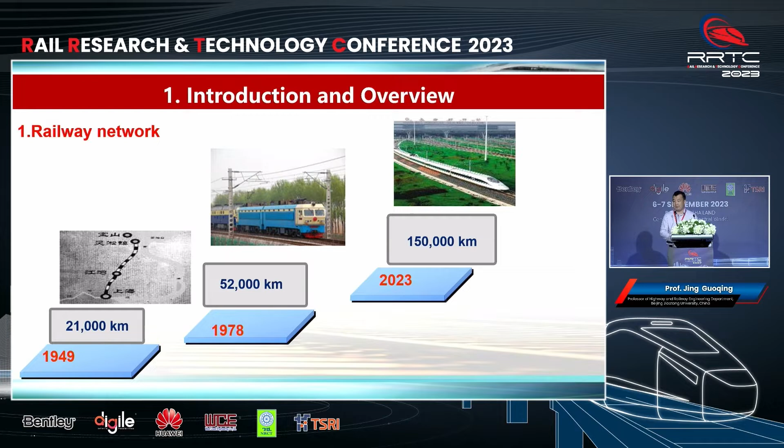And the operation speed, you can see, like 50 years ago, we shared the same speed level, normally less than 80 kilometers per hour. I would like to emphasize that from 1997 to 2007, it took us 10 years for 6 rounds of speed up, increasing our speed level to 200 and 250 kilometers per hour. In fact, by 2007, we had more than 8,000 kilometers of railway after speed up that can run at a speed of more than 200 kilometers per hour. At that time, we became the biggest network in high-speed railway.

At that time, not only speed up, 1 or 2 railways were newly built, the speed just 200 and designing speed 250 kilometers per hour. And in 2008, our first high-speed railway designing and operation speed is 350 kilometers per hour. Now, on the Beijing-Shanghai high-speed railway, the speed is 350 kilometers per hour.

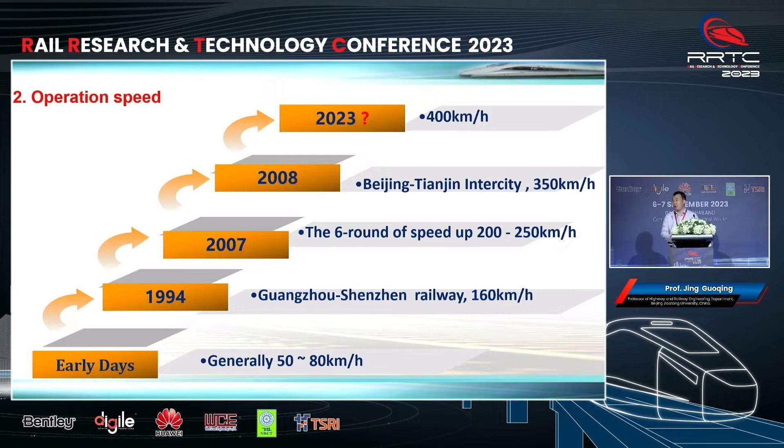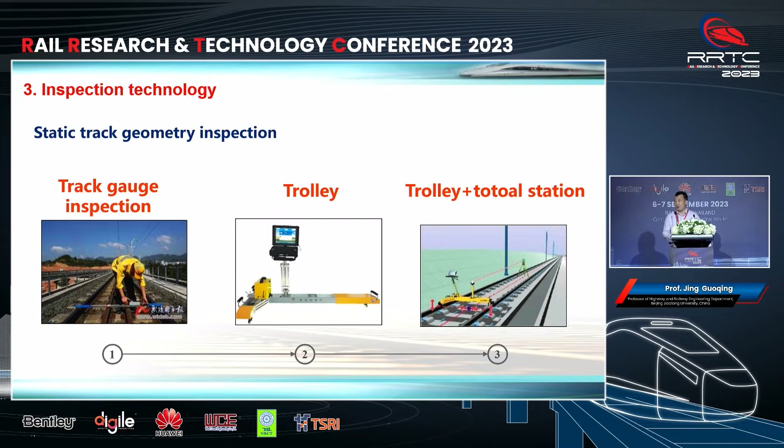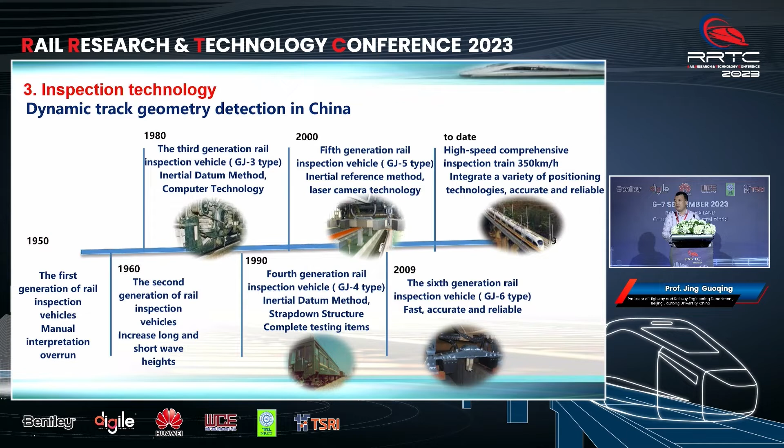For our inspection technology, normally we have 2 types. One is static geometry inspection based on gauge, ruler, trolley, absolute and relative methods for track quality. This is static. And we also developed dynamic track geometry. We imported the technology from other countries and developed our own system, generation by generation. Increase the speed, increase the system, increase the software for analysis. And this is the high-speed trains evaluating the track quality.

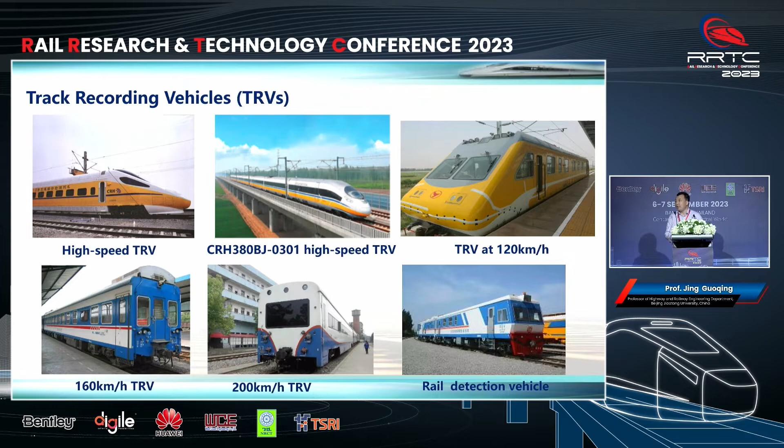For example, this one, we have more than 13 high-speed inspection trains with an operation speed of 350 kilometers per hour. This fleet is run by China Railway Academy of Science, responsible for all of China's 50,000 kilometers of high-speed rail inspection, twice each month. And we also have other low-level track recording vehicles run by the railway companies, 18 railway companies.

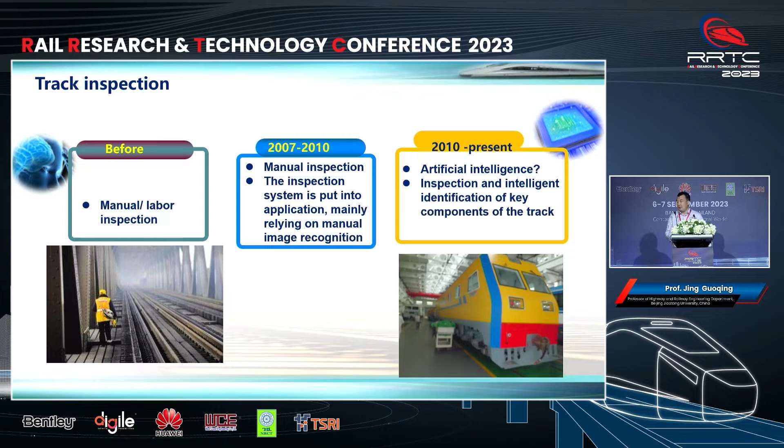And for our track inspection, in the past, we mostly depended on manual labor, and starting about 15 years ago, we developed computer-aided methods, like big data, sensors, management analysis. Nowadays, most of our result analysis is done by computer science. We call it a smart management system.

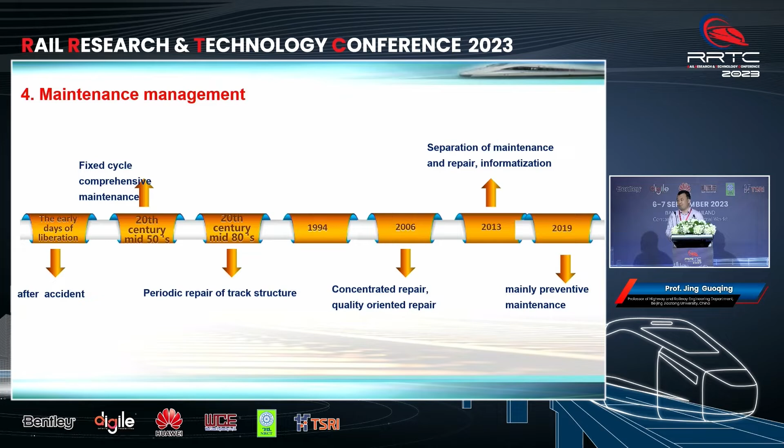This is our maintenance management system, like the standards for railway maintenance, periodic maintenance, and centralized maintenance. Now, from before COVID, we decided to depend on predictive, mainly preventive maintenance, but mostly we call it centralized maintenance. This is our maintenance management system.

Now we talk about the problems and challenges for China Railway track maintenance and evaluation. The first problem is labor. In the past, for example 4 or 5 years ago, every year China had more than 20 million newborns. But last year we only had 9 million. It is a sharp reduction of labor. This is the first challenge for us. This brings us some economic issues in China. And the second one is high cost labor. Each laborer in China earns at least 1,000 US dollars or euros monthly in salary.

We all know that track quality inspection, we call it 4DS: difficult, dangerous, dirty, and boring. No new young people like to take up railway inspection work because it's subject to human experience, time consuming, and mostly working in window time, which means very late at night.

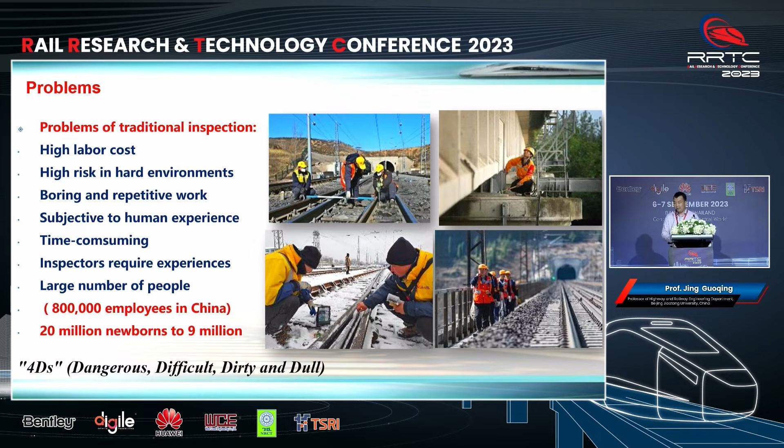This is our challenge. We want to use less labor, reduce cost, and nowadays in China, we develop robots.

For example, if you travel in China, in restaurants and hotels there are lots of robots for serving calls, delivery, reception, and even guard systems. It became very popular during COVID, and it has become a very popular industry for China. So lots of young startup companies are working on railway robots.

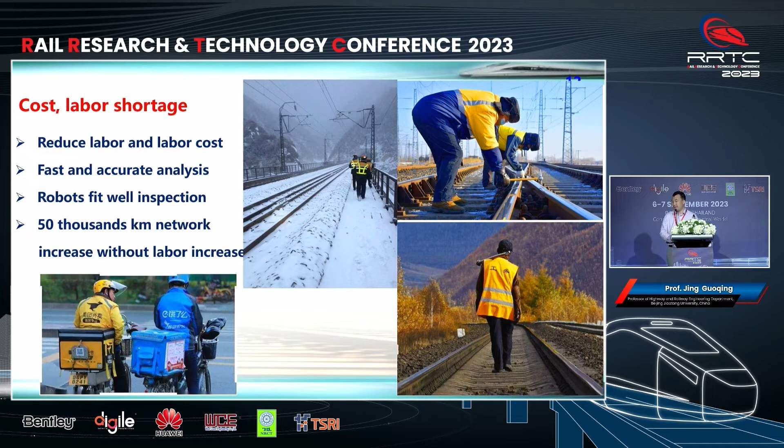Another solution is UAV for inspection. But there are problems in China. The first is rights for flight, because in China we have a very strict airspace rights control system. For example, in the Beijing zone, all year round there is no allowance for UAV operation. The second is pilot qualification, but now we have laws and regulations for these.

But for railway, UAVs have many advantages, for example in safety inspection. Everybody knows that along railways put into operation, there is no fencing, there are no regulations, and local people steal away parts and fasteners, resulting in big problems for railway safety. Now we employ UAVs for monitoring, for patrol, for safety.

Because in China we have many railway overseas projects, for example the same thing happens in Siberia. There are no regulations, no fencing, so there are lots of problems like vandalism, theft, and local animals running onto the track. But now we are using UAVs for patrol and management.

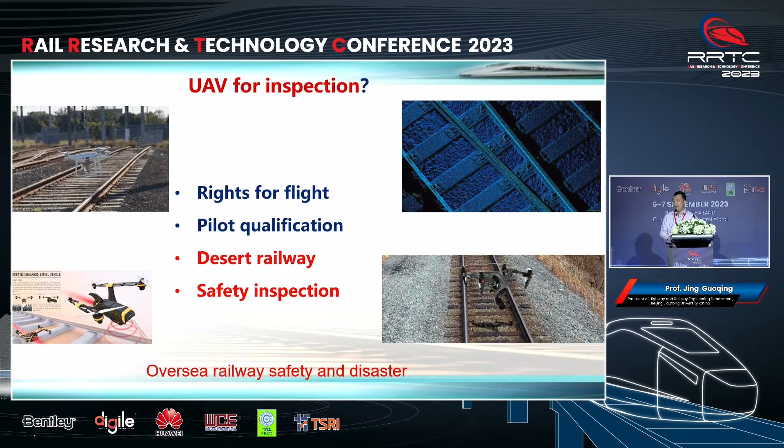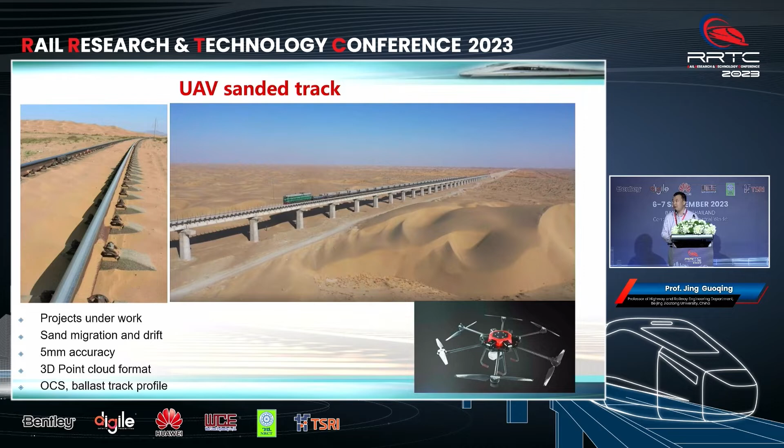Another thing is one of my research projects: we use UAVs for desert land, sandy tracks. Before and after sandstorms, we use UAVs to assess sand drift accumulation and distribution. Then we can make decisions about resources for maintenance.

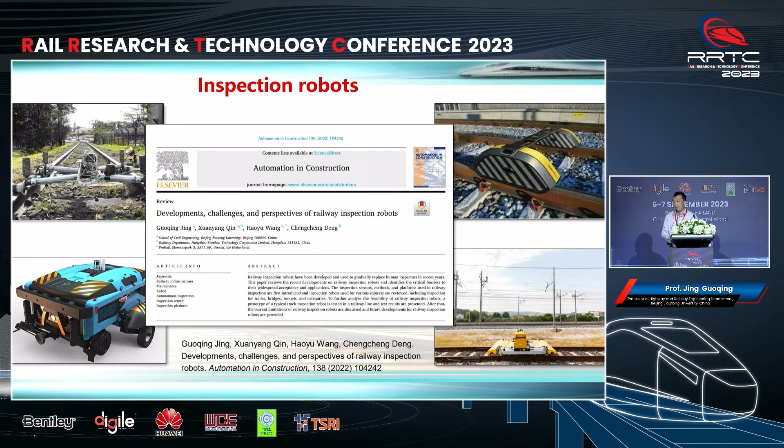Now we talk about railway robots. This is from a review paper I wrote with my team, about the challenges and perspectives of railway inspections. There are many railway robot companies in the world.

For example, the first one is from Italy - they provide this. The second one is a EU research product, it looks ugly. The third one is RailPod from an American company, this one can run automatically on the track.

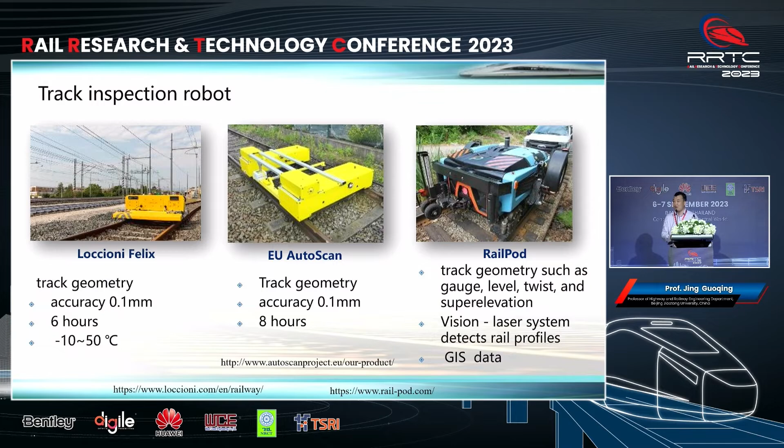Another thing I want to mention: at BKK airport, Bangkok airport, I saw an automated robot for cleaning. This is my first time seeing it in Thailand. I think, why not put it into railway and highway maintenance as well.

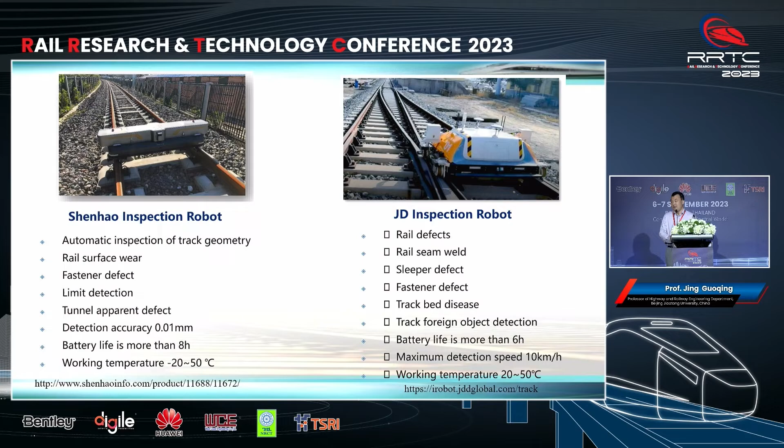In China we have about 6 companies developing railway robots. The first one, Shenhao, is one of my collaborators, and they use railway robots for track quality, fastener inspection, as well as the profile of the track. The second one is JD inspection robot company.

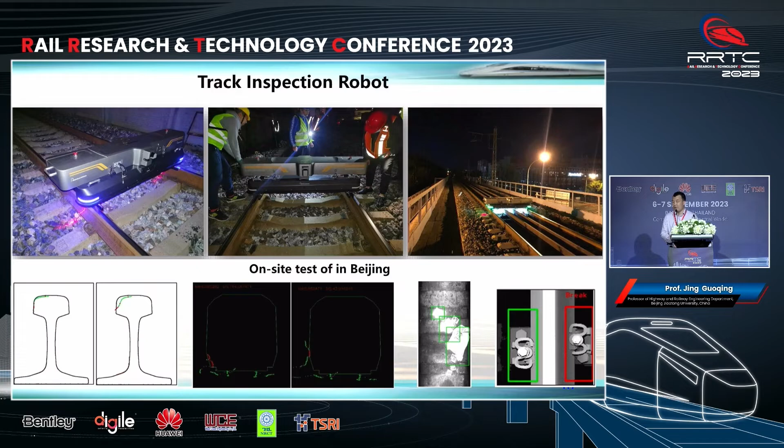This is what we did: we carried out tests in window time for the track, for fastener missing, and for profile. Another thing I want to mention is that the robot in the market costs less than $2,000 US. This is one of the trial products carried out in the Netherlands, designed to carry on and reduce the trouble and labor of railway workers.

I think in the future, with battery technology, we will have more robots paired with inspection engineers, reducing the trouble and the loneliness.

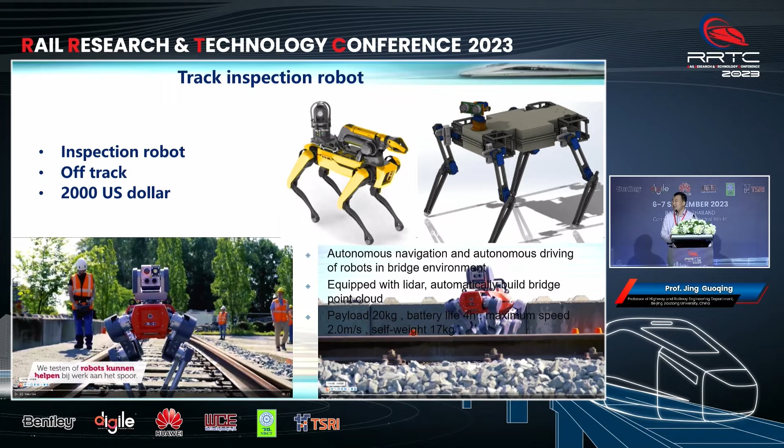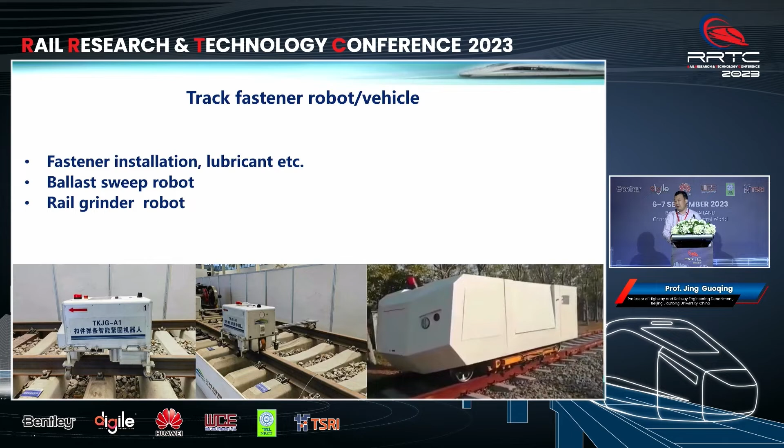A very big one, but we have trouble putting it into operation because the China Railway Department has very strict standards for vehicles put into operation on the track. We have standards as strict as a vehicle of rolling stock. So it is still put into, how to say, storage.

We also have robots for the undercar inspection. We have 3 robot companies in China, and this robot is used in China railway companies as well as metro companies. We export to Hong Kong and Singapore metro systems. It can reduce 80% of the engineers needed for inspection, with cameras for before and after analysis, very quick, 15 minutes, automatically run. And this is one for the roof inspection.

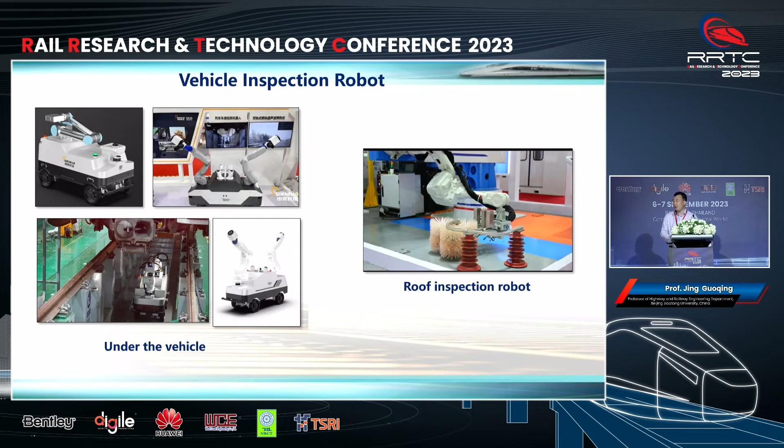We also have the robot for OCS, overhead catenary system inspection, especially for the metro system.

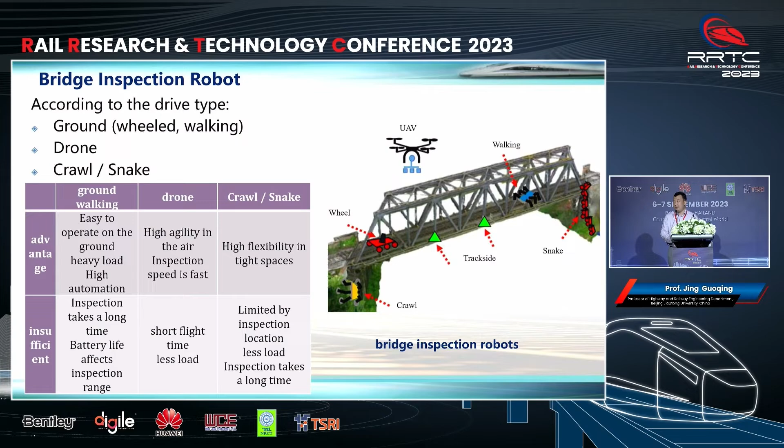There are also railway robot companies developed in China and in the world for railway bridge inspection. This is like our categorization, and these are also some examples from France and other countries for different types of application. And there are lots of bridges in China across rivers.

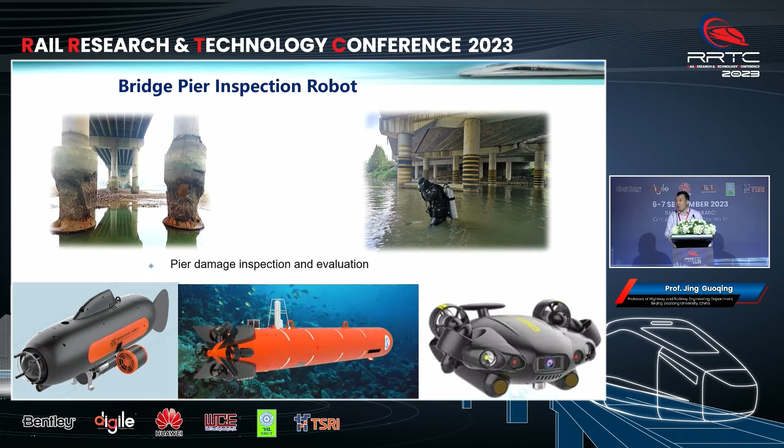So in the past, we used divemen, normally retired from military service, to dive into the river to detect the piers. But now many railway robot companies develop robots to detect the piers, like corrosion and damage, and use data analysis and computer science to analyze and provide a report. For example, for our Changjiang River, our Yellow River, the big ones, and even for some bridges across the sea.

Maybe this one. Okay, these are products from Amberg and EU, but we also have our own system. I think our system looks so ugly, so I don't present our photos here. The Amberg and EU product design looks handsome and smart.

So we use this. Each of these machines is about 1 million, more than 1 million RMB, but it can reduce the labor and work of railway workers. We have the system with, for example, GPR, laser, and camera, for all kinds of non-contact evaluation of the tunnel lining, as well as profile and falling rocks.

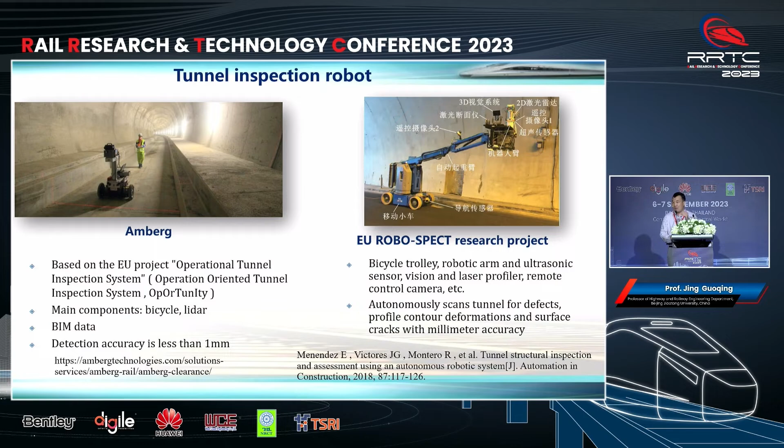This is one interesting from Japan. You know, Japan and Korea are like 20 years more advanced than China, which means they have more senior citizens than China. So with the aim to reduce trouble and labor, they use VR plus an operation robot to do some overhead OCS maintenance work.

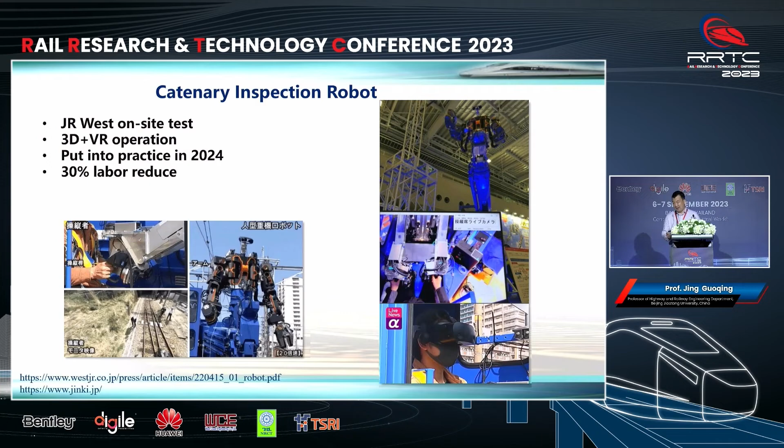Interesting. And the next part is part of my team's research and perspective for the future. Okay.

In fact, for the past 20 years, I have been working on ballast track, like ballast and sleeper. You know, almost all of China's huge scale railway construction is coming to an end. Most professors have shifted from structure dynamics to evaluation. So this is my global vision about the future of railroad inspection.

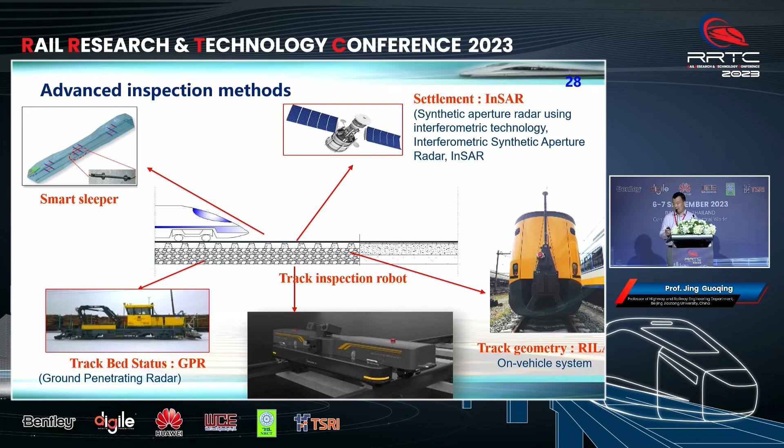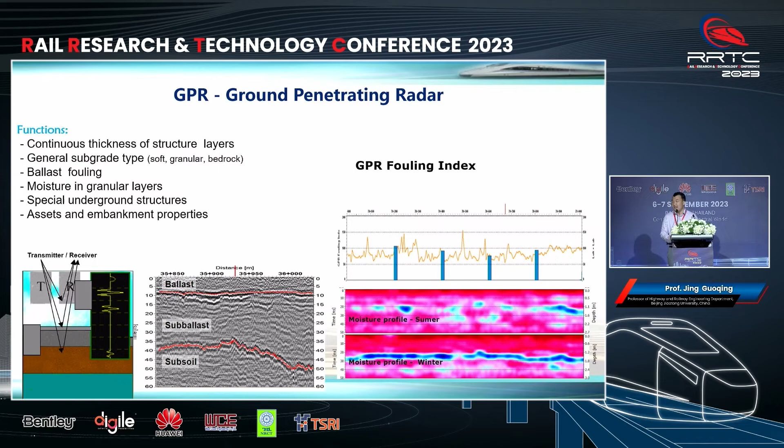This is GPR, and I noticed that Thailand has one high rail company developing rail infrastructure inspection. We developed GPR for track maintenance. During COVID, we tested more than 30,000 kilometers of ballast track in China.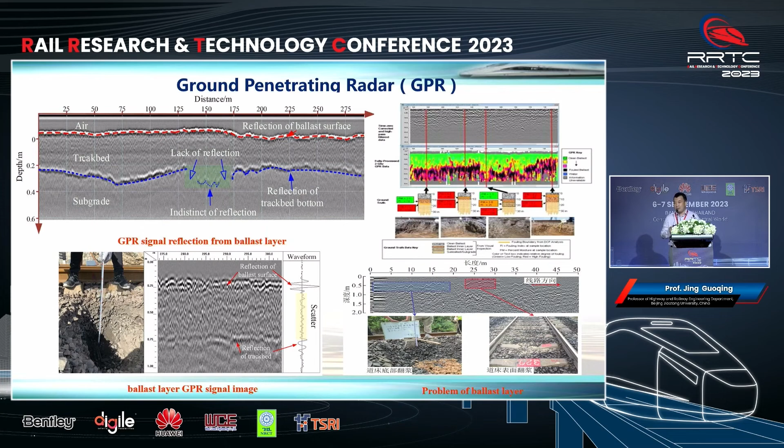This is our system for detection, inspection, and also validation. We set up a track of 30 meters with different ballast quality for validating our GPR system. This is my publication from the past 4 years.

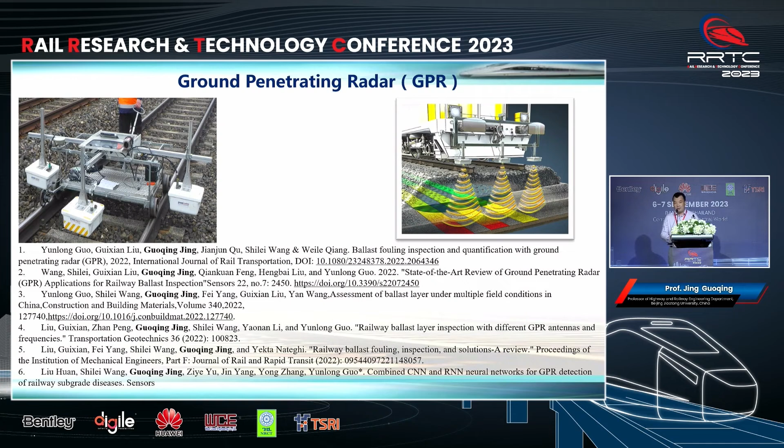This is a manual, but normally during operation, we just install it under the car body. It can run at a speed of 160 kilometers per hour, and collect the data. Then my team makes the analysis, and produces a report for the railway company for maintenance, for tamping, for cleaning. It can detect things like moisture, the fouling index, as well as the thickness of the ballast bed.

This is my research, a RILA system developed by one of my former students who worked for this company. Other countries like Germany and America also have similar products and services.

We also have our own onboard system with sensors to detect the track quality profile. But this one is special, it's in front of the car body. In China, it is forbidden to install it there. Most of our onboard systems are inside or under the car body, not in front.

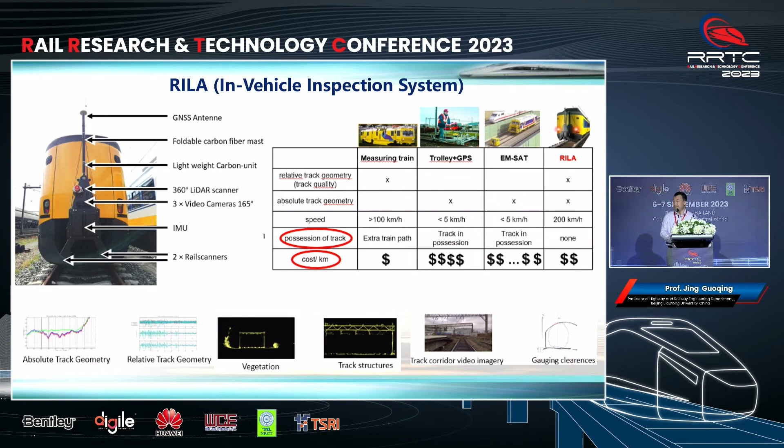Now we talk about smart sleepers. In the past, the sleeper was just one important part of the track, keeping the geometry and distributing force to the substructures. But one idea occurred to me: why not make it smart? Which means to install sensors to record dynamic acceleration and recover energy from solar.

Inspired by several companies' products, we published a review paper, actually two review papers. One of my former PhD students working with CNTs, we published several papers making the sleeper sensitive to deformation.

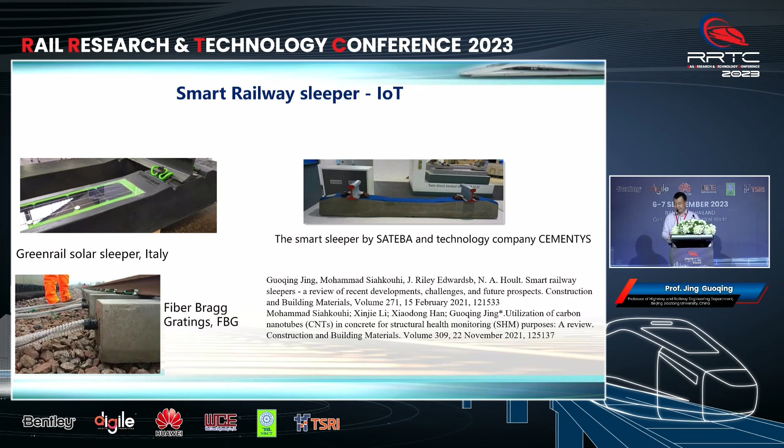This is the carbon nano sleeper, where we add carbon nanotube to the concrete. The concrete sleeper deformation will result in electricity resistance change, and then we collect signals weekly or monthly, so it becomes like a smart sensor or recorder. If we put 10 or 20 smart sleepers along the track, it becomes like a structural health monitoring system, cheaper and reliable. This is one of our ideas.

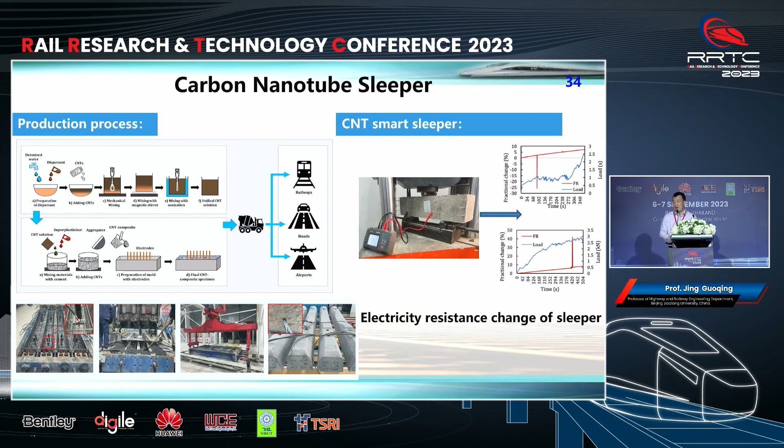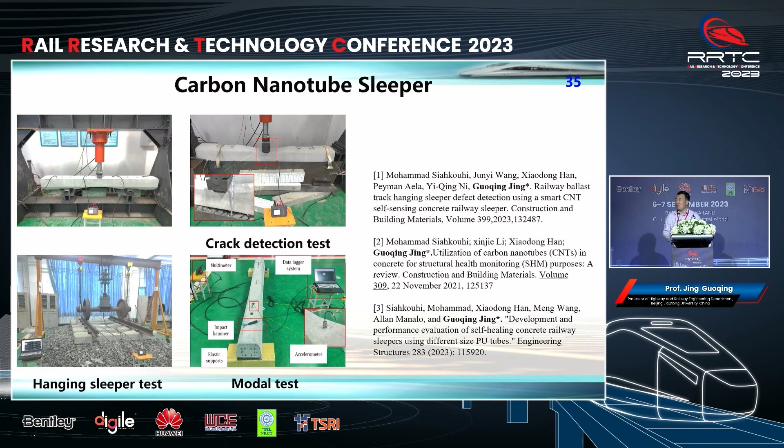Since we did the tests, calibrations from the material to the small beam and then to a real sleeper, with dynamic as well as static loading to test the resistance and the signal of electricity, it works very well. This is one of our ideas.

Next is piezoelectric sleepers. Green railway as well as digital railway is always the trend of railway development, so why not collect electricity due to the cyclic loading of the passing train? One of my master students worked on this, buying sensors and installing them during the concrete sleeper fabrication. But this test did not work very well because of the pre-stressed concrete sleepers, there are too many steel bars.

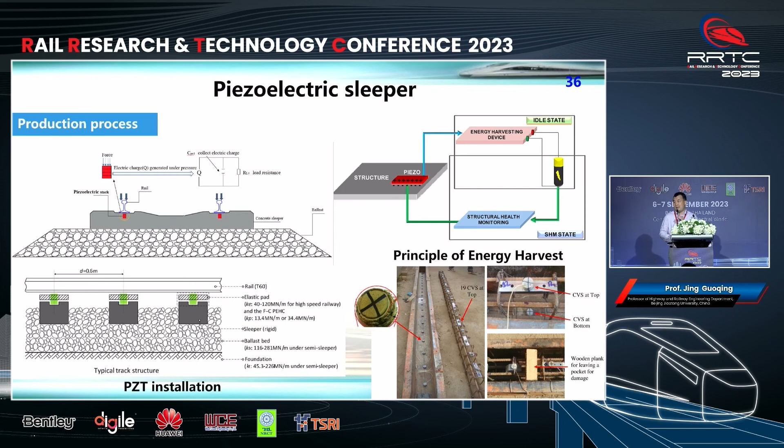Next step, we will use composite sleepers made of plastic or rubber, so there are no confining or disturbing steel bars.

Next, we'll talk about smart ballast. This idea was initiated about 10 years ago by UIUC, putting sensors into the ballast and using 3D printing, things like that, to make the ballast smart so we can get the response of dynamic acceleration and displacement.

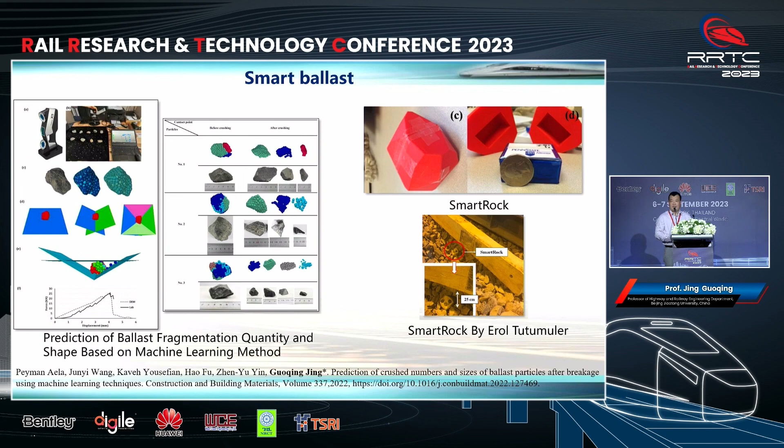One of my research projects uses machine learning to predict ballast breakage. We validated 5,000 ballast particles under the crushing machine to test and predict ballast breakage due to loads. This is one of our papers.

In conclusion, I think smart sleepers as well as smart track could be used for future railway track quality evaluation as well as health monitoring, using artificial intelligence technology to improve the level of intelligence.

My team, one third of my students, work on machine learning and computer science with backgrounds in software and civil engineering, but from the master's degree, three years totally working on computer science, like machine learning, AI, together with automation engineers and electricians, sensors.

In the future, in my opinion, it will become a system from the substructure, the track, as well as the train, working even with the aerial, like satellite links, working together to monitor the track or the safety of train operation at all times and in all spaces.